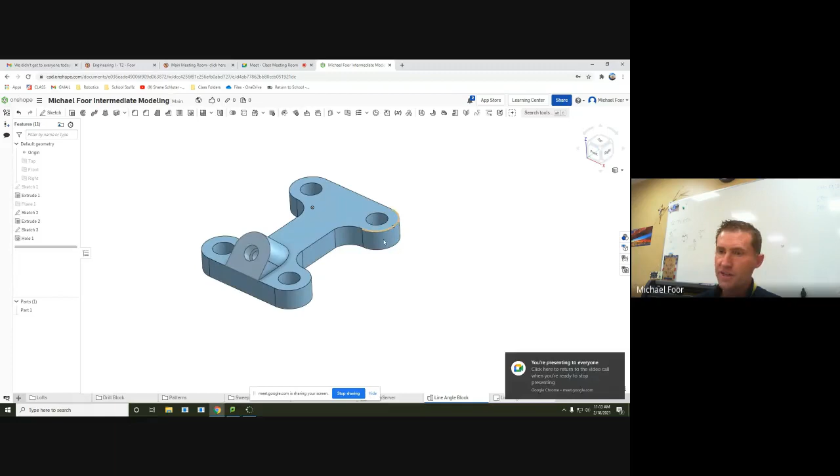All right, this walkthrough video is to help you create the angle block in OnShape. This starts out with some fairly complex sketching, and then it has this drill plate right here. It's a counter bored hole that's drilled into there, but it's at an angle, a 45-degree angle, and it goes right up to the face. So it's a little bit more complex, or actually quite a bit more complex, than we've done in the past.

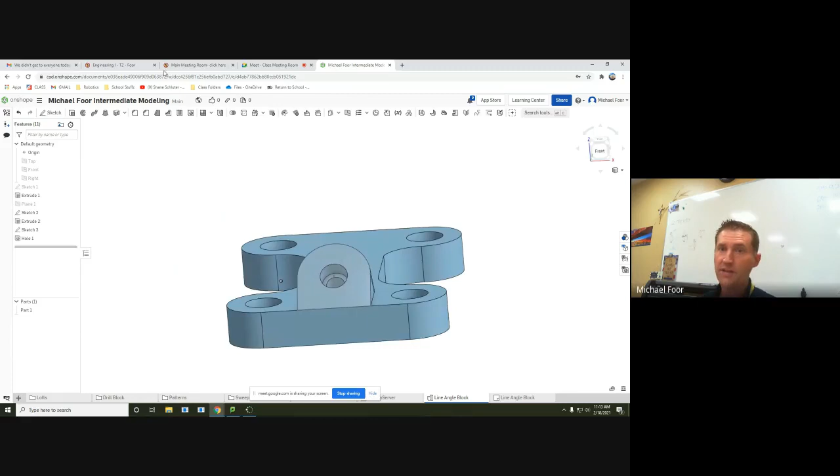Now these dimensions and everything for this are going to be in Canvas. If you go to the angle block assignment, not the drawing, that's next week, this has the sheet that has all the dimensions and everything. So I'm going to walk you through creating this so you can follow along.

The easiest way to start this is with the 4 circles. It kind of has this I shape with 4 circles, so it's probably easiest if we start with those. The holes themselves are 0.5 inch diameter, and the larger ones are 0.5 inch radius, meaning a 1 inch diameter. They're offset by 2 inches and then 3 inches. So I'm going to start with those - this is what it's going to look like. Let's go ahead and dig in.

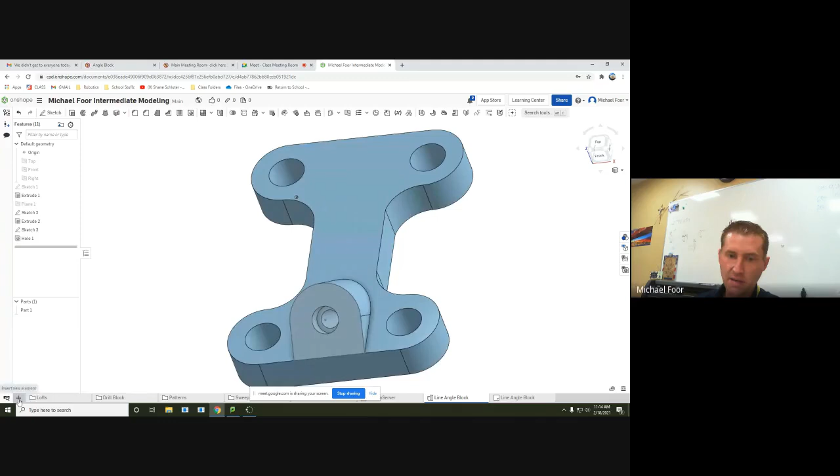We're going to create a new part studio. This one's going to be in our intermediate modeling folder. I'll rename this angle block 2 because I've already built one, so it doesn't get confused. I'm going to sketch right here on this top plane, and we're going to start with our circle tools. So we have a 0.5 inch hole, and then we have the 1 inch for the corner.

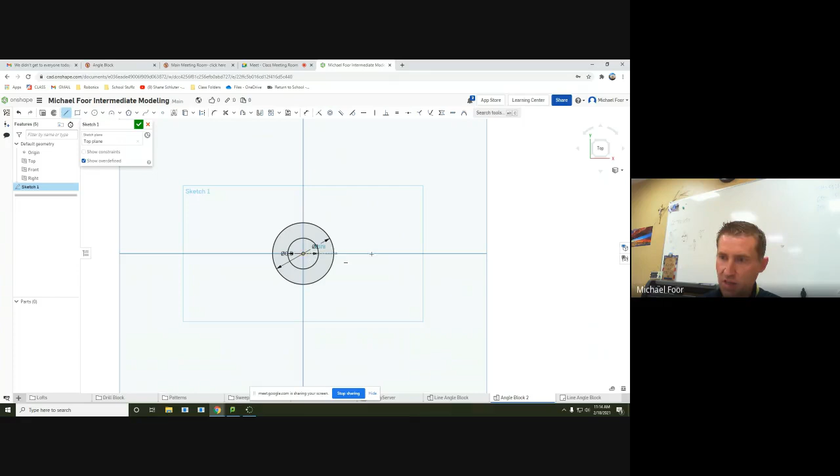If we go back here, we can see that the next one is 2 inches over. So I'm going to grab my line tool, create a line on the horizontal, and make it 2 inches. Then we're going to do another 2 circles - this one's 0.5 and another one that's 1 inch.

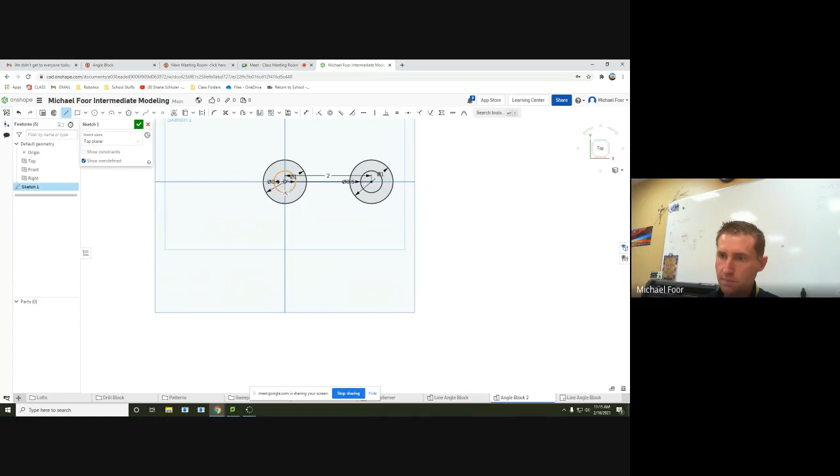If we look at our next dimensions, we have another 2 that are down 3 inches. So we're going down 3 inches, and then we get another one. I can also use the shortcut key C if I want to create a circle, so we'll do 0.5 and then 1. Then we come over 2 inches - or I can just press L for my line tool - and come over 2 inches. This is going to be our last one, so we'll create another 0.5 inch circle, and then one final one for 1 inch.

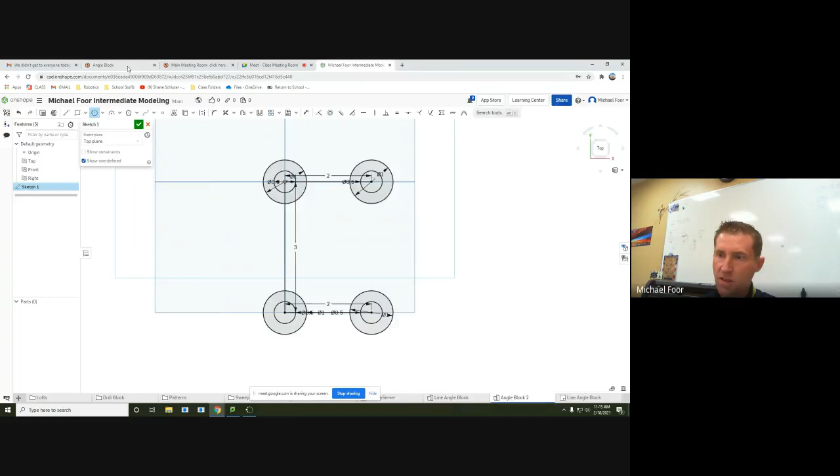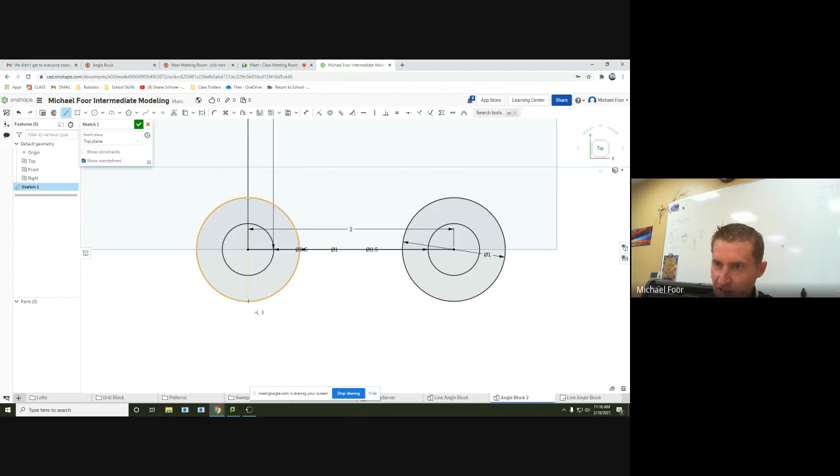So now we have the circles, so now we have to start creating the line. If you look at this, the top and bottom just have a straight line connecting them, so that's going to be pretty simple. I'll grab my line tool and make sure that when you're drawing this, it snaps to the circle - if you hover over it, it should be highlighted orange, meaning it's going to snap to the circle. Right here we can see that little dotted line, meaning it's going to be on the tangent as well, which is what we want. So we'll do the same thing over here.

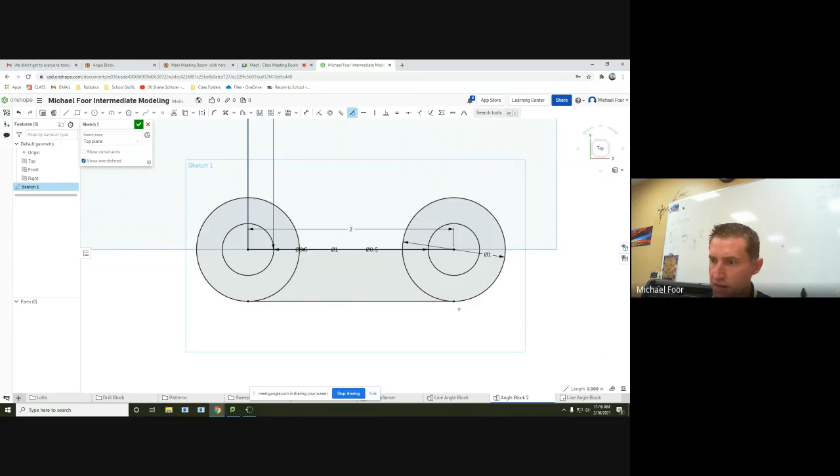We'll come over and we can see this is my line right there, snapping to that tangent line and it's horizontal. So we'll go and click right there, and I'm just going to make sure this is tangent. I'll get my tangent constraint, click on the line, click on the circle, and it turned red just because it is tangent. So I'll just Control Z - that was just because I had the same constraint 2 times.

All right, so let's go up and do the top. I'm going to grab my line tool - again we'll lock on, make sure the circle's highlighted, meaning it's snapping to it. We have our tangent point right there, so that one's good. Now we have those lines.

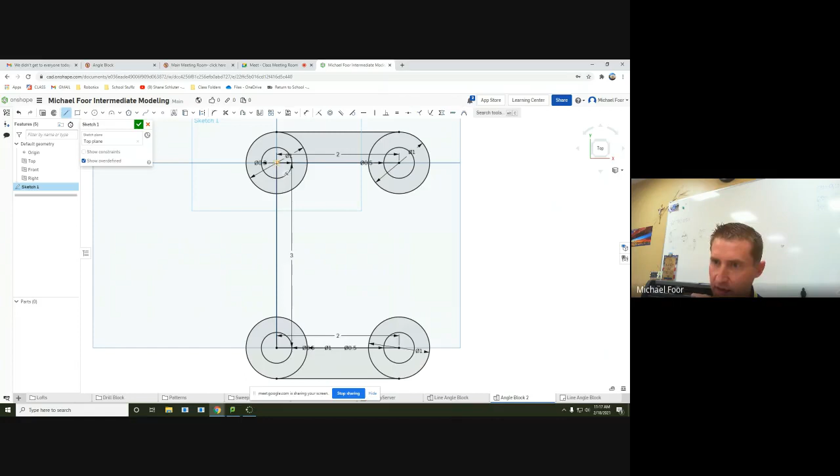So now we need this kind of inside - we have an arc, and then it kind of has a center line. We can see on the top left, this is 0.5 inches from the center of the circle to the line that's on there. So here's how I'm going to do this next part: I'm going to get a line and draw this from the center of the circle over 0.5 inches, and that gives me a line that I can just drop here. I know that this is going to be that inside edge - I'm just going to draw it down there. We can always trim or add to it later if we need more.

So I'll do another one, 0.5, and make sure it snaps to vertical. I'm just going to take this down here - it doesn't matter exactly where you stop because we're going to be making this tangent.

Oops, did I draw that the right way? Well, that was supposed to be from the... nope, this one's good. All right, so this side's good right here.

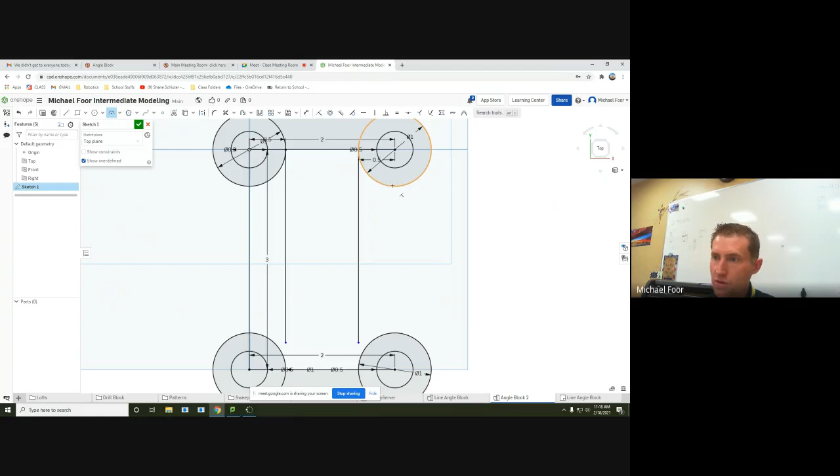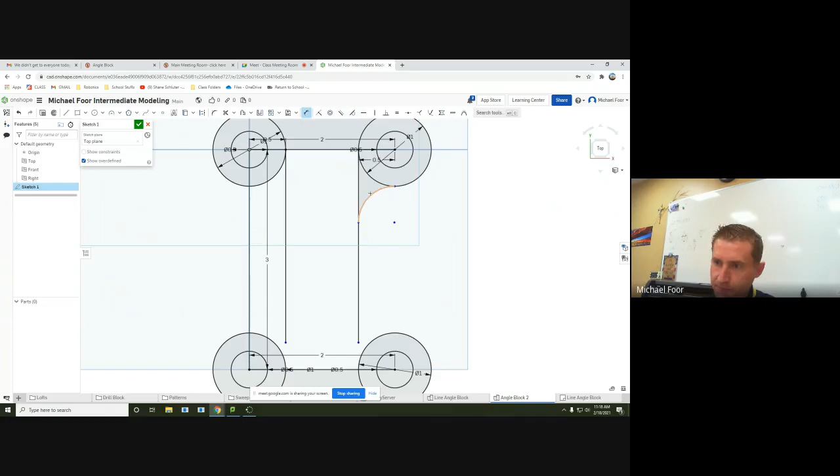I'm going to get my arc tool, going from the circle to this line, and just place it here. I'm not worried about the size or exact points, just make sure it snaps to the circle and the line. Then I'll get my tangent constraint, click on the line, click on the circle, that's tangent to the circle, and then do this again. Click on the arc, click on the line, and now it's tangent here. Then I'll grab my dimension tool and make sure this is 0.5 inches radius. So there we go, that's how we do the arc.

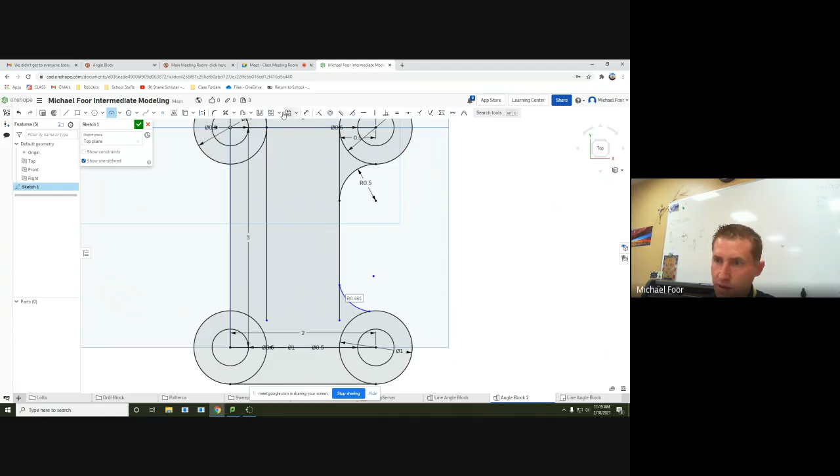We're just going to do that for the other three now. So I'm going to get my 3-point arc. We'll click on the circle, click on the line, just give it its starting bend. Then we do our tangent, tangent, and then we'll dimension. So this one's tangent, this one's tangent, then we'll dimension it to 0.5.

Then we do the same over here. So this is going to go from here to here, I'll drop it. Tangent, tangent, and then we dimension. So tangent, tangent, and dimension. This is going to be 0.5.

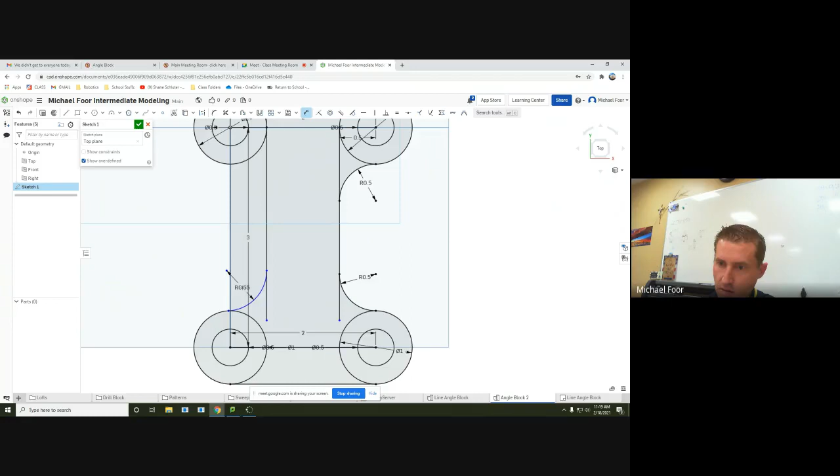Now we have one more to do. So we have our arc, snaps to the line, and just get it dropped into place. And we tangent, tangent, and dimension. So tangent to the line, tangent to the circle, and dimension it to 0.5 inches. There we go, so now we have all of our pieces here.

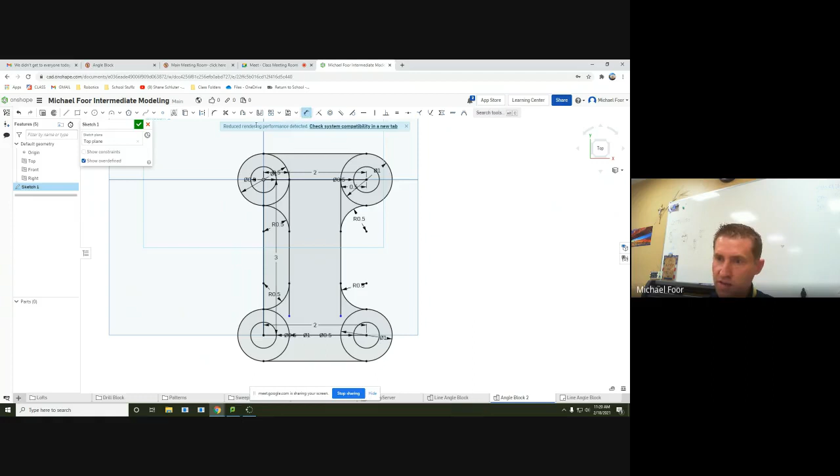I need to clean this up a little bit because we have all these extra lines and stuff everywhere. So let's grab the scissor tool. I'm going to get rid of everything except for those parts that we need. That's angry right there because I just deleted a line that was being used to dimension. That's okay, we don't need it anymore. So I'm just going to go through and clean up everything that I don't need.

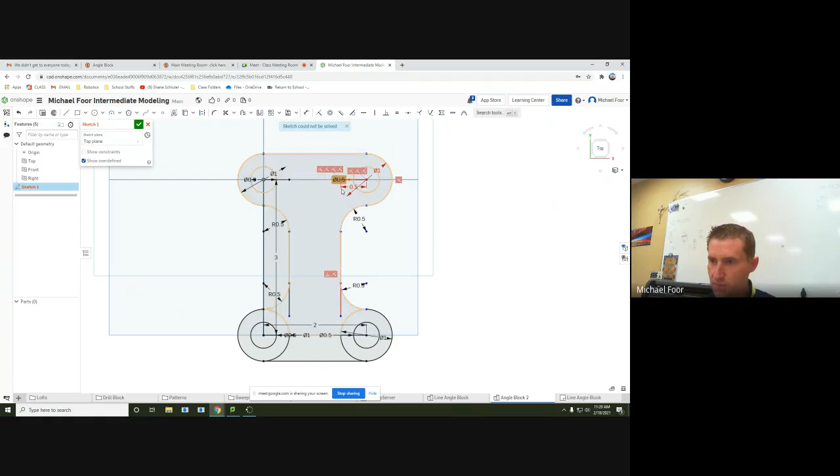So I can get rid of these dimensions if that's messing me up and I don't like it. We'll just click on these and delete, delete, delete. And I'm just going to keep deleting all this stuff that we don't need. Don't worry about the red stuff as long as you have all of your lines. So I'm just going to keep deleting and trimming, and you can see as I trim off these line bits, those will go away. We just need to make sure that we keep the parts, the lines that we're actually going to need at the end.

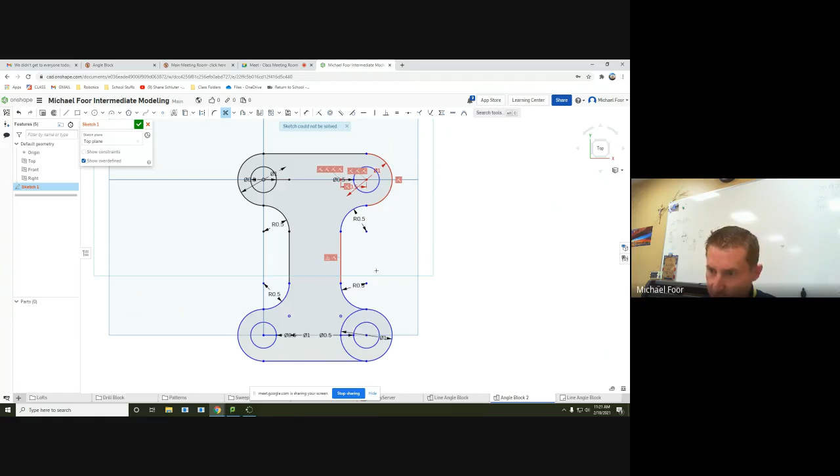So I'm just getting rid of all of these, and then that looks pretty good. So we'll say OK, and there's my sketch. Oops, looks like I forgot to get rid of those two lines. That's OK, it should extrude anyway. Oops, actually that might be a problem right there.

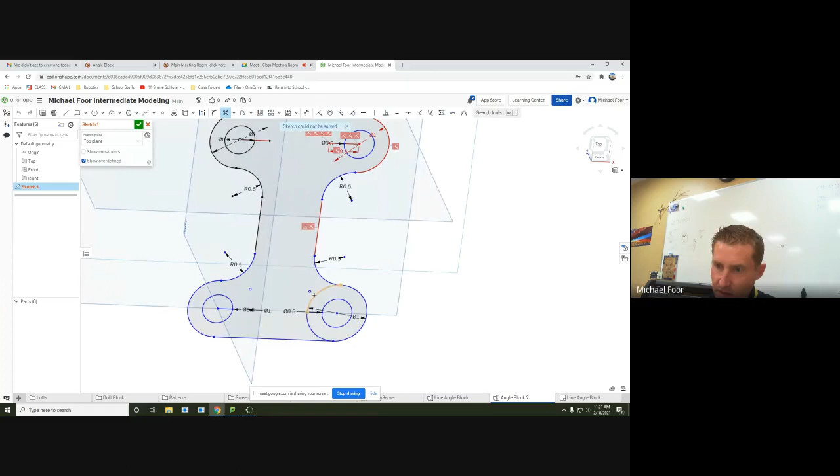You can always go back on a sketch, so if you ever need to go back, we just double click on the sketch. And I forgot to trim this. So let's trim this and this, let's get rid of this line, and then we'll get rid of these lines. Oop, that makes it happy.

There we go, so now we know this is an enclosed face because it's dark gray. If it were white, that would be because we have an error somewhere and we need to close it up. So when you actually have a closed face, it turns dark gray. Okay, it doesn't matter about that line, we won't have to worry about that, guys.

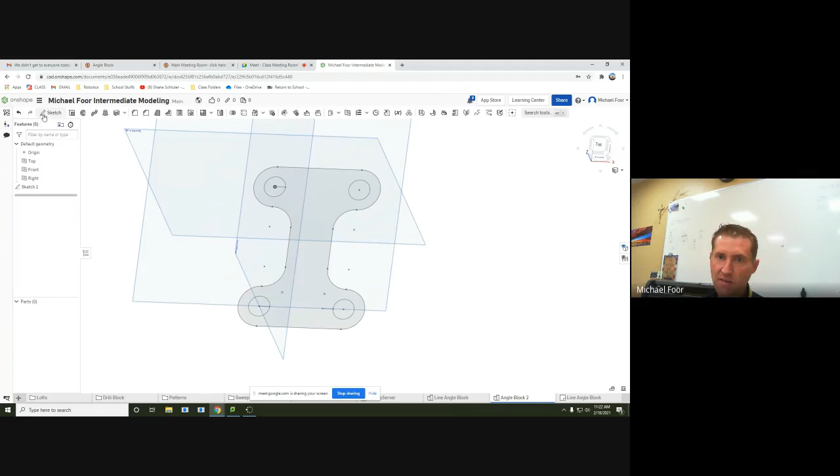So we're just going to extrude this. If we look at the dimensions, the thickness from the bottom left is going to be 0.5. So I'll hit extrude, and we're going to extrude 0.5 inches, just like so. Right now we have kind of the I shape.

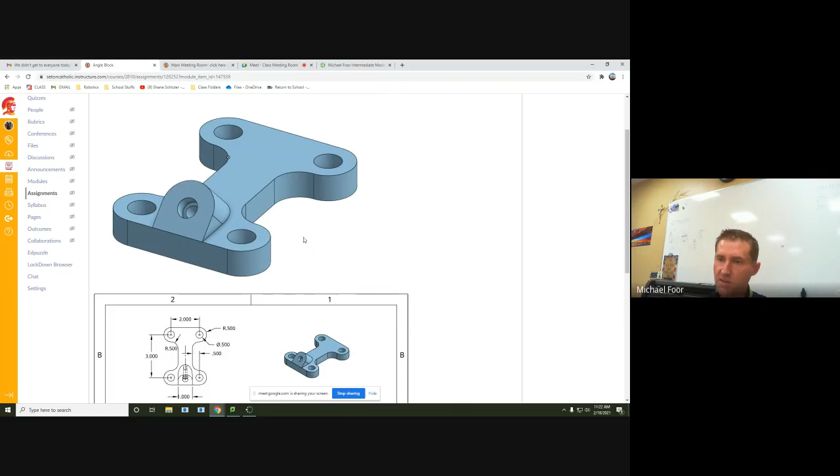So what we need to do now is create that 45-degree pop-out block. Now we've gone over offset planes, but an offset plane would kind of make this still 90 degrees and parallel to our part and perpendicular on this face. That's not what we want, we want it to be 45 degrees. So here's what we're going to do: we're going to use a new type of plane, called a line angle plane. So up here, we're going to click on plane.

We're going to change this from offset to line angle, and the one we want comes from the edge. This is called an edge in modeling - we have point, edge, and face. What we want to do is grab this edge, it's yellow, click on that, and make this 45 degrees.

If we click on this arrow, that'll flop it back and forth. We want to make sure it looks like this - that's where it's going to be, so that's at a 45. We have our plane right there, so we can hit OK. That's our line angle, 45 degrees, and that's the edge that we chose.

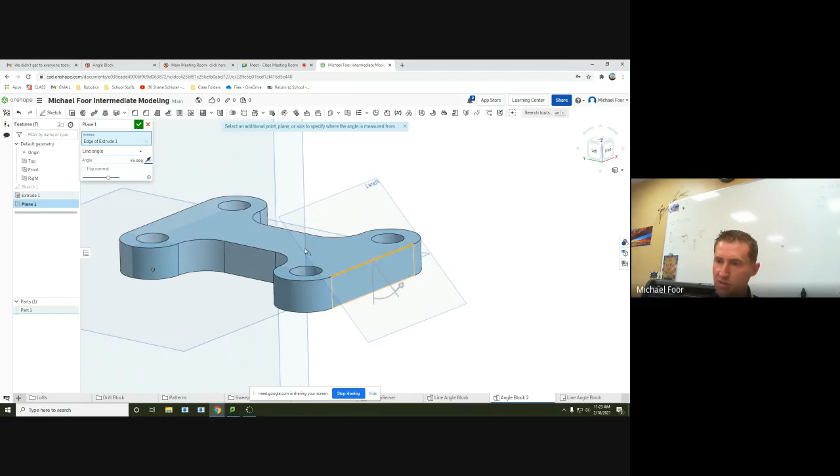Click right there, so now we're ready to do some sketching here. I'm going to sketch on this plane. In order to have our view so we see this straight on, or normal to it, we can right click on this and go to View Normal to Sketch Plane, and that'll line it up so I'm looking straight at it.

Let's look at the bottom right one so we can see we have a 1 inch kind of circle, and it's 1 inch wide, we can see on the top left. So 1 inch by 1 inch, and it has that circular part on the top. All right, here's how we're going to do that.

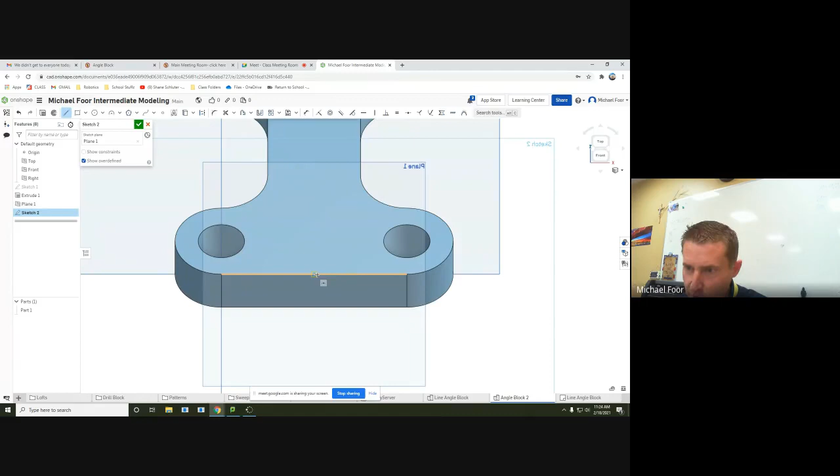I'm going to grab my line tool. We'll snap to the midpoint right here, come over 0.5, up 0.5, over 1, down 0.5, and finish back up there. So we made a little box. It's red because I accidentally hit this one twice, so I'll delete this dimension. We still have all our lines, I just deleted that dimension.

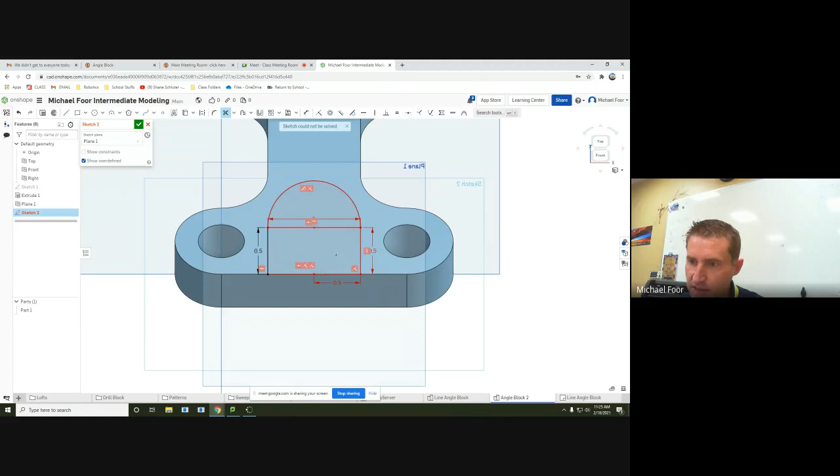Then I'm going to get a circle. We'll snap from the midpoint right here, then snap to this edge, so it gives me a 1 inch circle. Then we'll trim off the bottom. Again it's red because I was using those for dimensions, we'll get rid of those. And that's what we want right there.

So we can see now we have this face. It's dark gray, meaning it's an enclosed face we can use for extruding. If yours isn't dark gray, make sure you created these two bottom lines here, because we need those as well - this needs to have all these edges bounding it in. Once we have that, we're good to go.

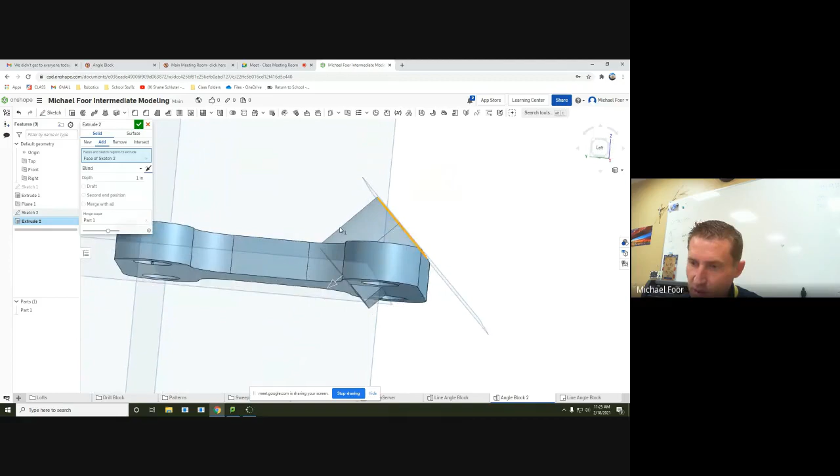If we look at this, this needs to extrude into the face of the part that we have. So I'm going to extrude this guy. You might have to flip the direction where it starts, but the problem is it pokes right through the bottom, so that's not going to work. We could change the depth to make it less deep, but unfortunately then it doesn't go all the way up to it.

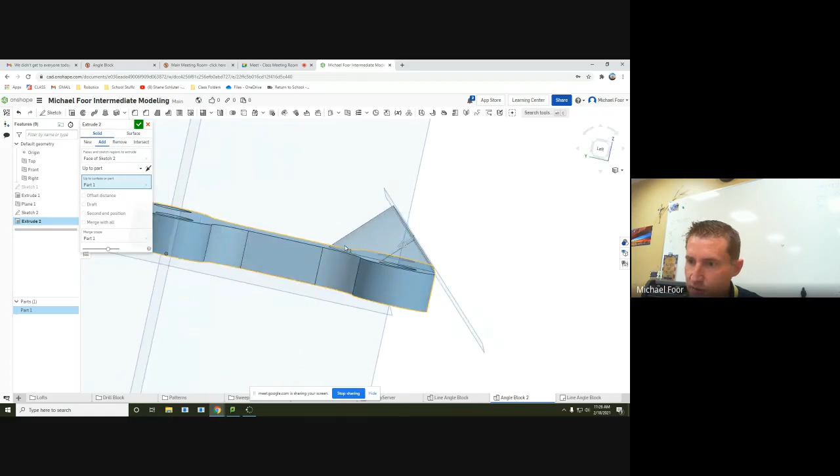So what we're going to do is make this up to part or up to face. Let me show you how that works. Up to part - click that, we click on our part, and it'll take it right up to the part. We could also do that with up to face - go to this face, and it'll take it right there. Pretty much does the same exact thing.

So we're going to extrude, make sure you do up to face or up to part. Click on the blue face right there, and it should take it right up to there, and then it won't go through. So that's a solid part right there.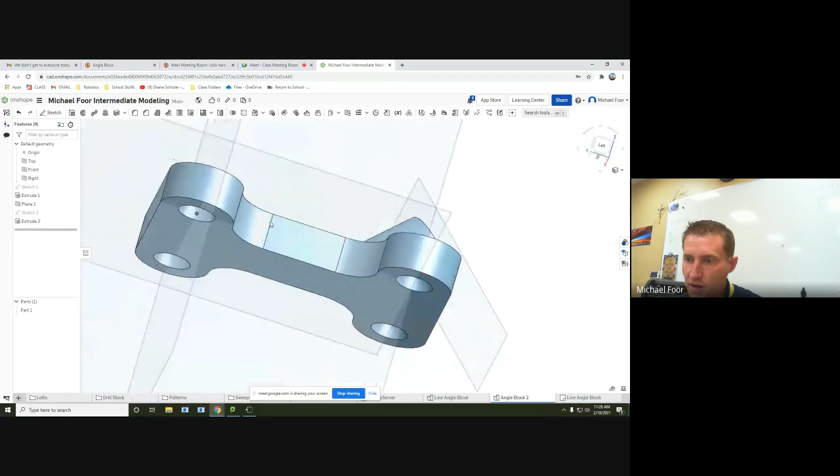The last thing we need is our counter bore hole that goes right through the center of that circle. This is going to be pretty simple, so we'll just do a sketch on this face. Let's make it normal to the sketch plane again, and I'm going to grab a point, hovering around till I get the midpoint right there.

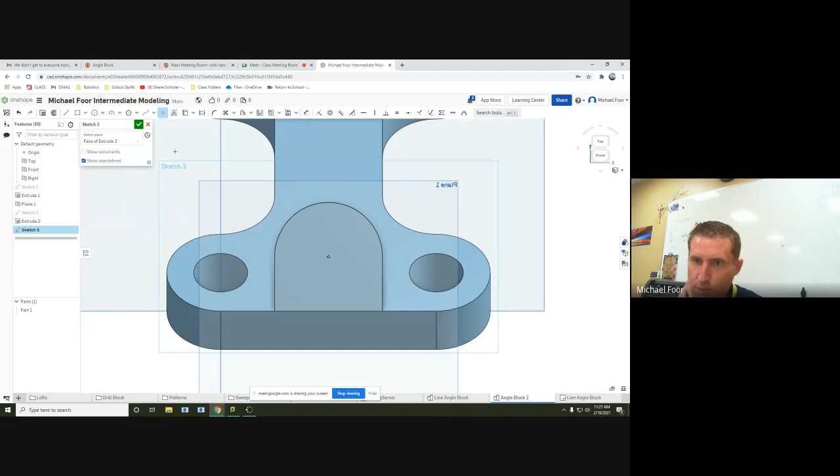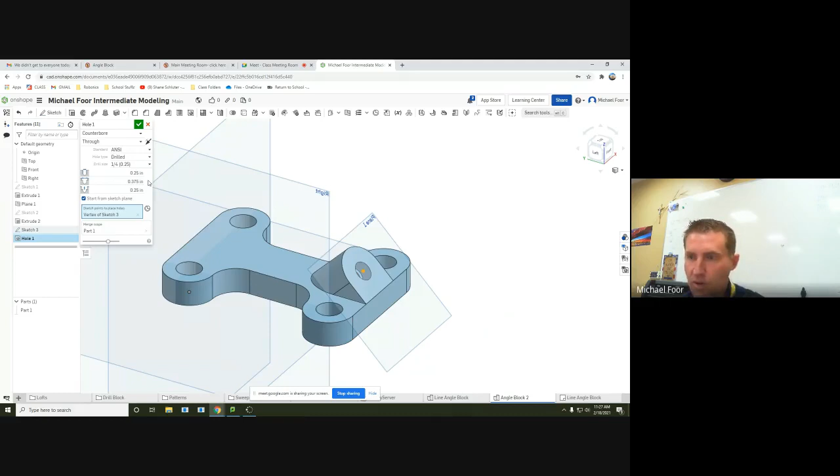You can see that little midpoint icon pops up, so we can place our point. We'll say OK, and from here I'm just going to use the hole command, click on my point - 0.25, 0.25, 0.375, 0.25. Those are the correct values, so there's my hole callout, I can see everything is good. You can pause on this part of the screen to see what the settings are. We'll hit OK, and there we go - we have our angle block all done.